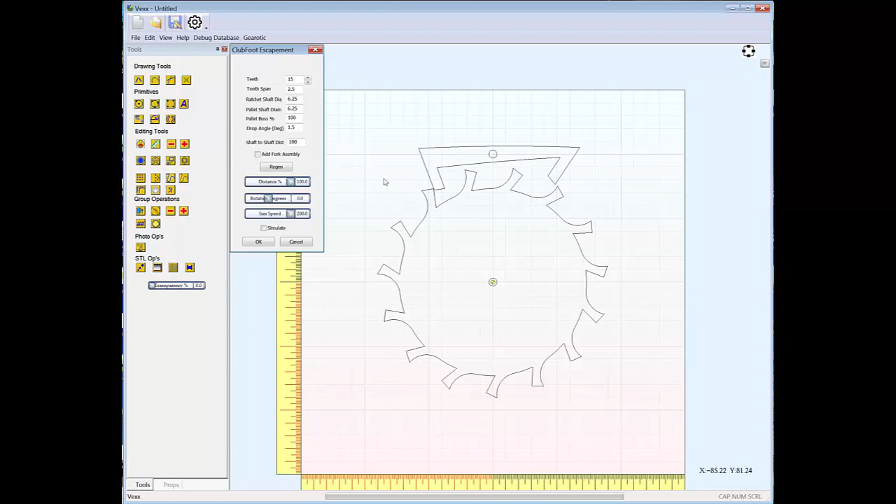Hello everyone, and welcome to another video on the ClubFoot escapement. I've added a fork assembly to the escapement for those who wish to take it to the next level. And all you have to do on the dialog is you check this box, add fork assembly.

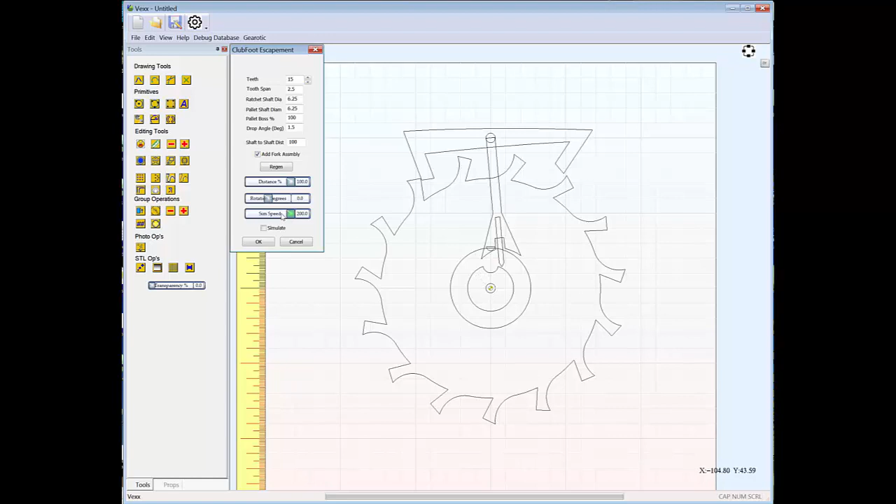Now this is a typical lever escapement fork and impulse pallet arrangement. I've arranged this so that the impulse pallet is on the same shaft as the ratchet, just for ease of use, but it's not necessary for you to stick with that. We have a couple sliders up here for distance.

We can move our fork and impulse pallet to a new position if we like, and we can also rotate it to another position. It will work in any position, so it's unimportant where you put it, but this allows you some flexibility to put it in a place that fits the overall design of whatever kind of kinetic mechanism you're trying to make. I've limited you to a distance equal to the shaft-to-shaft distance as a maximum.

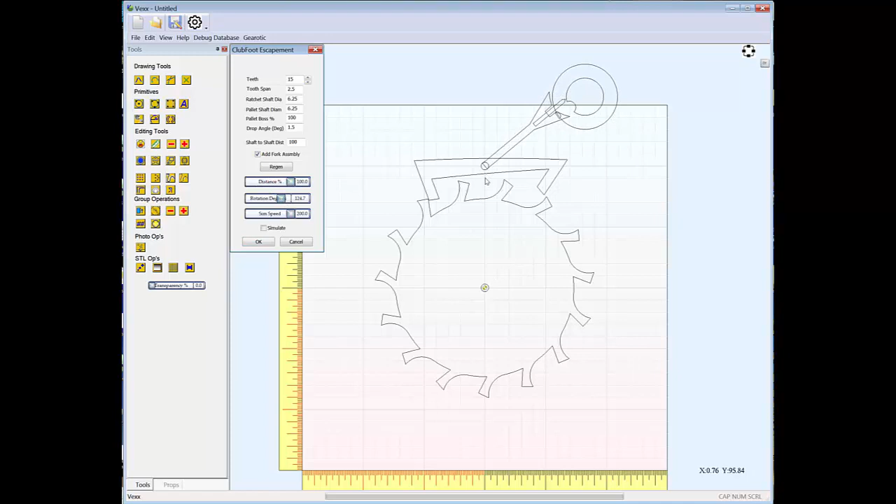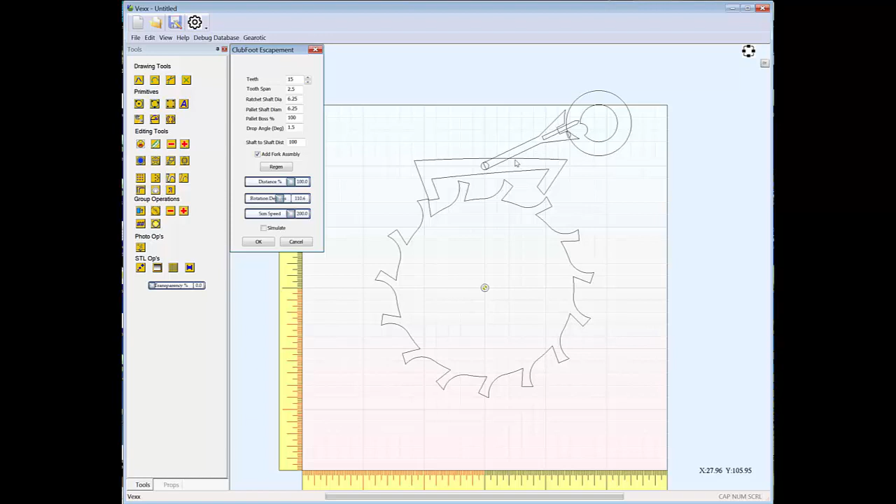The math gets a little bit out of whack if you get too far away. But you can rotate it to any position within a circle of that radius. Now let's take a look at how this works, just so that we have a full understanding of it. And I'm going to start by pointing out that I have not connected the fork to the pallet. This is left as an exercise for you when you're done.

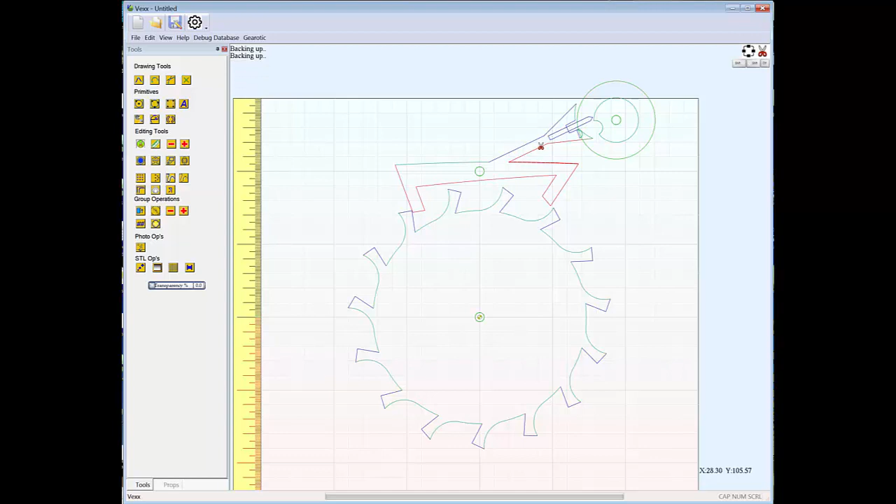Just quickly, in order to do that, if I hit OK, I'll get this as a drawing, and I can now take my scissors, and if I intend to use this thing, I just simply clip out the parts that don't join, and now we have a working fork and impulse pallet arrangement. All right, let's go back to our design screen. We'll delete that and bring up our ratchet again and hit a regen. Now let's hit simulate and just take a look at how this works just quickly.

Now in this simulation, of course, there's a weight on the ratchet wheel which makes it want to turn clockwise. The pendulum is hanging off of the center of this impulse pallet, and you can use gravity, or you can have a wheel like in a watch where you have a recoil spring moving a larger mass wheel on this back and forth. But it works just as well with a pendulum hanging on this central axis.

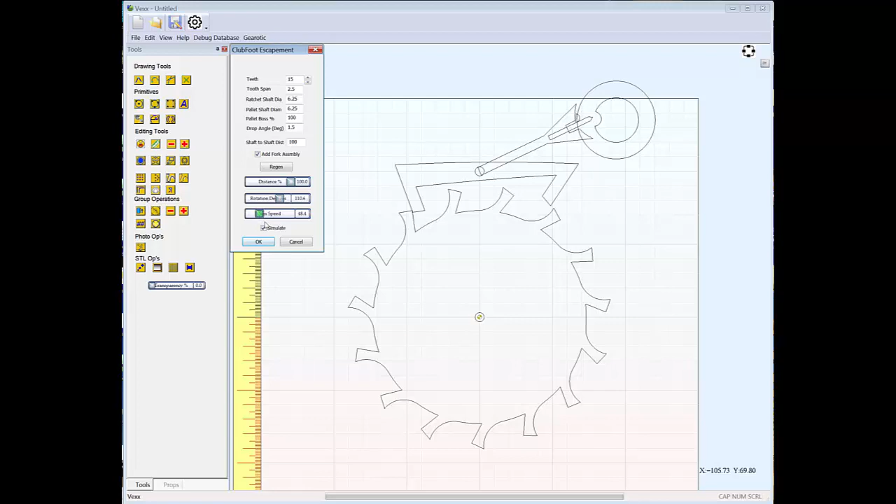And the whole point of this escapement is to transfer energy to the pendulum without causing any friction or touching the pendulum when it's not receiving energy. So I'm going to slow down this simulation, and I'll show you what the explanation of the impulse pallet is. We'll take this down to very slow, and we'll stop it right here for a second.

This pointy bit is normally glued on top of the fork, and it's called the dart. And the dart's job is to make sure that no one can bump your clock and get it out of sync when it's not supposed to be moving. In other words, the only time that this rocker is allowed to free a tooth is during the time that this impulse pin here is within this slot on the fork.

So if we let the simulation run a little bit, if you imagine now someone tried to tilt this rocker, they would have to tilt it upwards to a point that the bottom of this tooth reaches the top of this tooth before the ratchet would be free to slip.

But before that could rise enough, this dart up here would hit our safety disc. So this is a lock during normal swing of the pendulum to make sure that this tooth cannot release through vibration or through being bumped. There is only one time that the dart can pass high enough up for these teeth to miss, and that is when the dart is inside this crescent.

There is a time, however, that the dart is free to move, and we'll just hit simulate until we get to that spot. You have a sim speed button here at the bottom. Now at this point here, our dart is pointing at our crescent, but it still isn't time yet for this tooth to be released. That shouldn't happen until our impulse pin hits inside this power delivery slot.

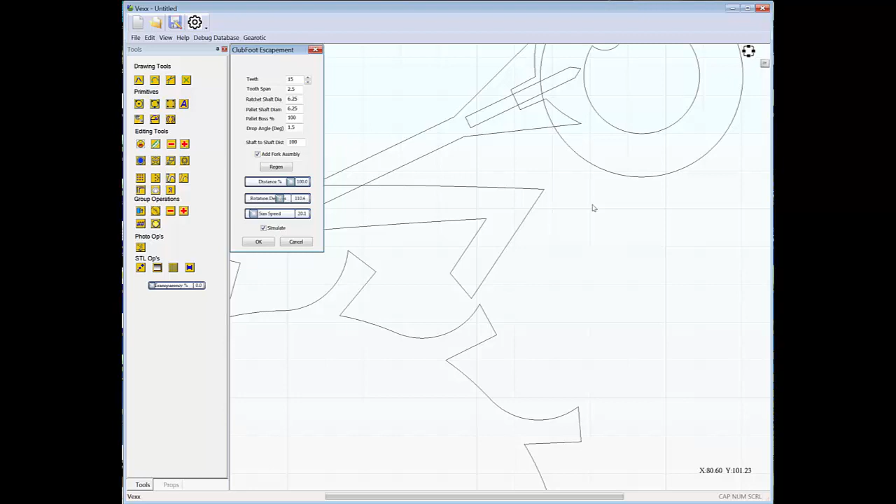So at this point the pin is pushing, the back of the slot has pushed on the impulse pallet, the pendulum has gained energy, and it will go until it runs out of energy, at which point it will reverse direction, and the entire process will repeat using the two teeth on the other side of the pallet.

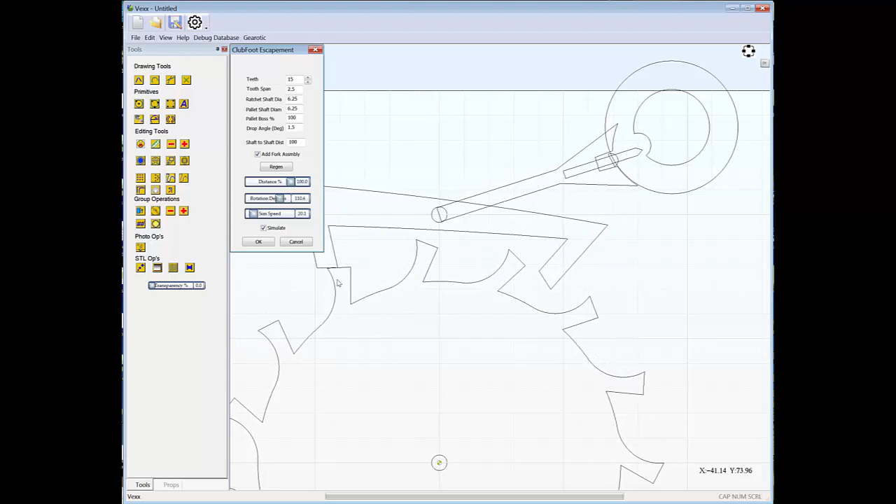And if we watch it come in, dart is now released, horn is inhibiting, pin enters slot. We begin, the teeth are now pushing, the back of the slot would push the pin, and the pendulum gets energy to continue on the other direction. So that's it. That's how a lever escapement is supposed to work.

By moving these things around and hitting OK, you can select a drawing which gives you all the proportional parts necessary to build a proper lever escapement.